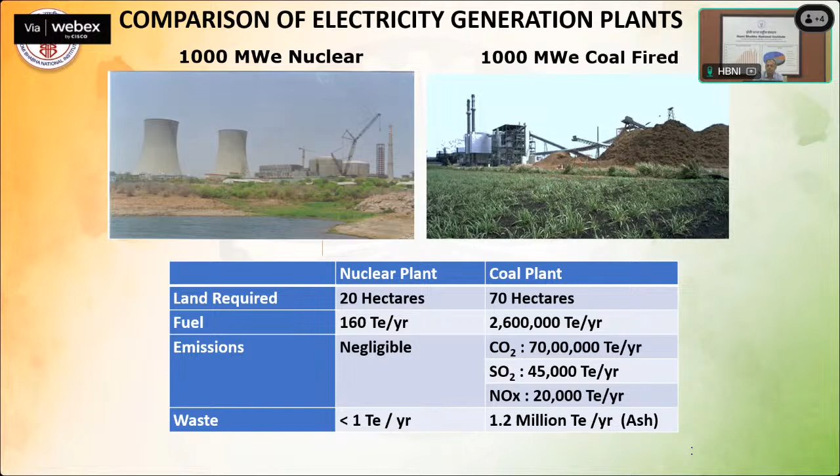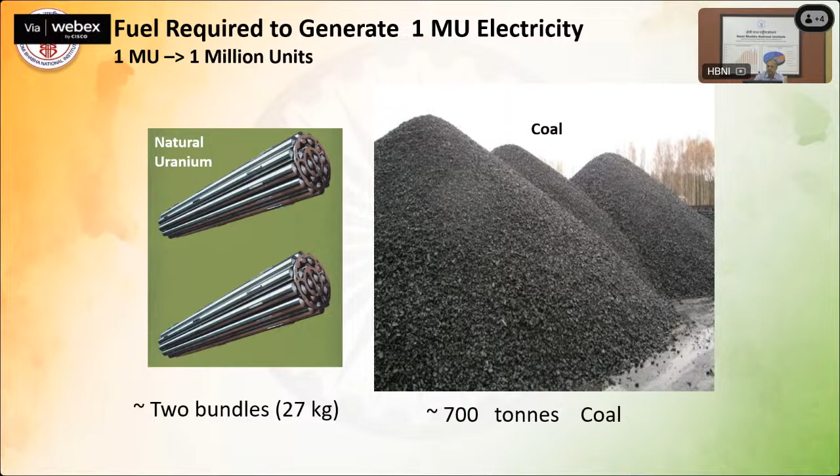What is the effect? There are no emissions from a nuclear power plant in the form of CO2, NO2, NOx gases, or SO2. From thermal power plants, when these gases are emitted, we see the greenhouse effect, which results in warming of the Earth's surface and the total atmosphere, because these gases trap the heat and do not allow energy to escape into space. That is how the temperature goes up around us year by year as time flies.

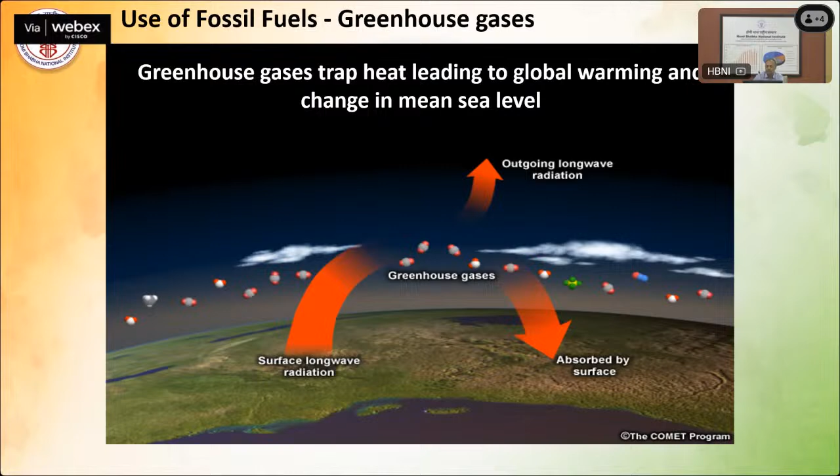So greenhouse gases trap heat, leading to global warming and change in mean sea level. The result is the impact of fossil fuel on climate - we get floods, we find glaciers continuously receding in the Himalayas, and this global warming results in a change in mean sea level by 1 meter, which will devastate India's coastal landmass. A lot of cities may get submerged if this trend is not stopped.

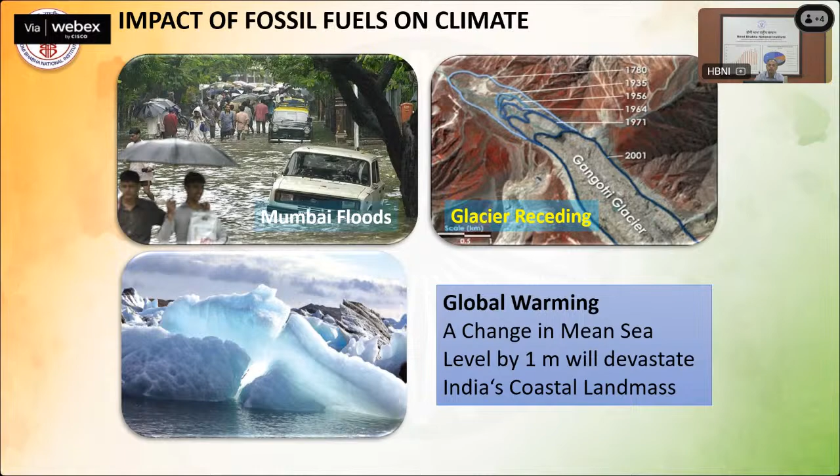We have various types of reactors in our country: boiling water reactors, pressurized heavy water reactors, pressurized water reactors, fast breeder reactors, and advanced heavy water reactor - though that last one is not in reality as on today, it is still in design. For fast breeder reactors, we have the fast breeder test reactor at Kalpakkam, and a prototype fast breeder reactor is coming up at Kalpakkam, a 500 megawatt capacity unit, which may be ready very soon.

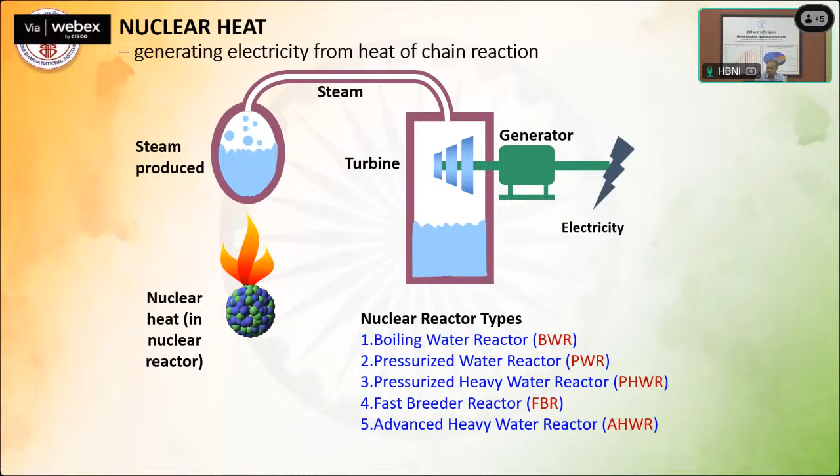In the core, the nuclear fission reaction takes place, and heat is removed from the fuel bundles in the coolant channel of the core through a primary heat transfer system. Then we have the steam generators, where steam is produced, and that steam is used to drive a turbine. The turbine drives the generator. You will find that the primary heat transfer system, the core, everything is placed in a containment structure - there are dual containments, basically to improve safety.

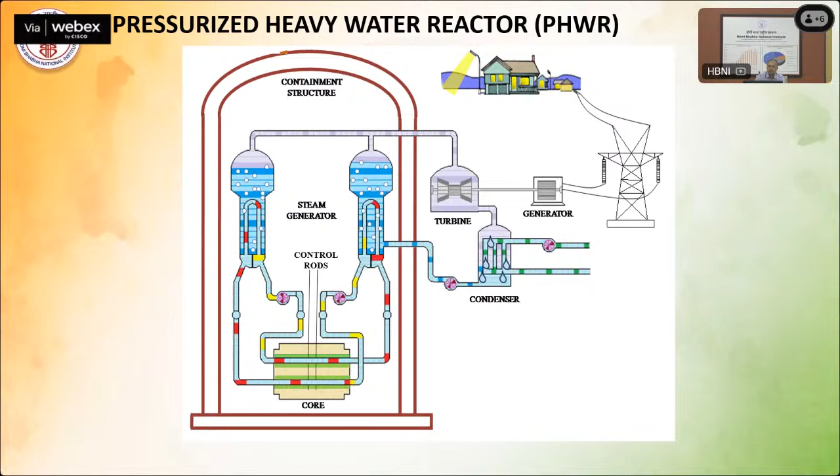The barriers are in the form of the pellet first - the fuel bundle, as shown earlier, actually contains a number of fuel pellets, and that is one barrier. Then the cladding - zirconium cladding - all those pellets are pushed into a cladding. The cladding is placed in the coolant channel, shown in red, which is flooded with the coolant. Then the primary containment building is there, followed by the secondary containment through the reactor building, and we have an exclusion zone for safety of the public.

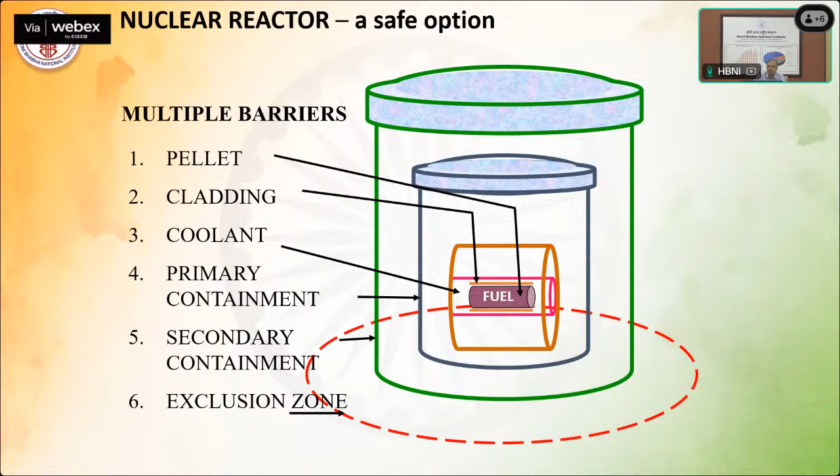India's three-stage nuclear power program. Basically, the idea is to utilize the country's vast reserves of thorium. That is our aim. So how do we go about that in stage one?

We have already mastered stage one, and now we are working closely on stage two. In stage one, we have PHWRs where we use natural uranium as fuel. From the spent fuel, when the fuel is used in the reactor, what is left out is the spent fuel. We call it spent fuel, but as I mentioned in my previous lectures, it still contains very useful isotopes like plutonium, and it still contains depleted uranium U-235.

So that can be reused and recovered. This uranium and plutonium are recovered in our reprocessing plants and can be used as fuel for fast breeder reactors. We are already using that in FBTR. In FBTRs, we use this plutonium and thorium as blankets, and thorium gets converted into U-233.

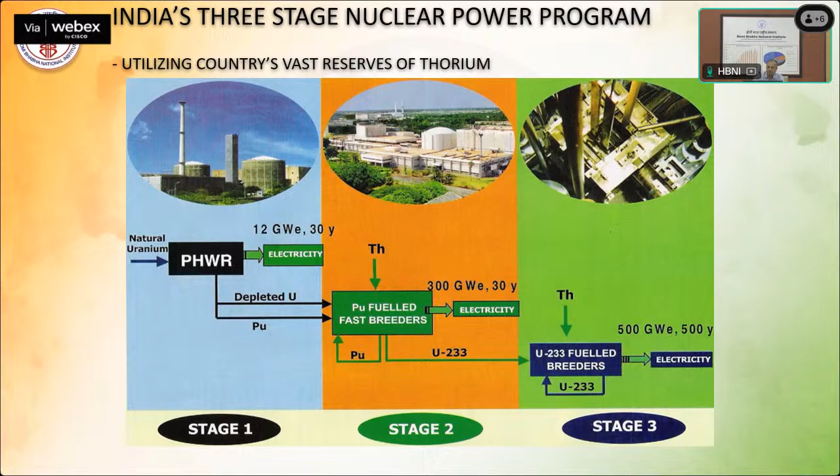The same thing is shown in this slide. I think I'll have to go a little faster. So stage 1, stage 2, stage 3, same as shown. The three-stage nuclear power program ensures optimal utilization of uranium and thorium resources. We have plenty of thorium resources and we aim to use those resources for generation of electricity as efficiently and as soon as possible.

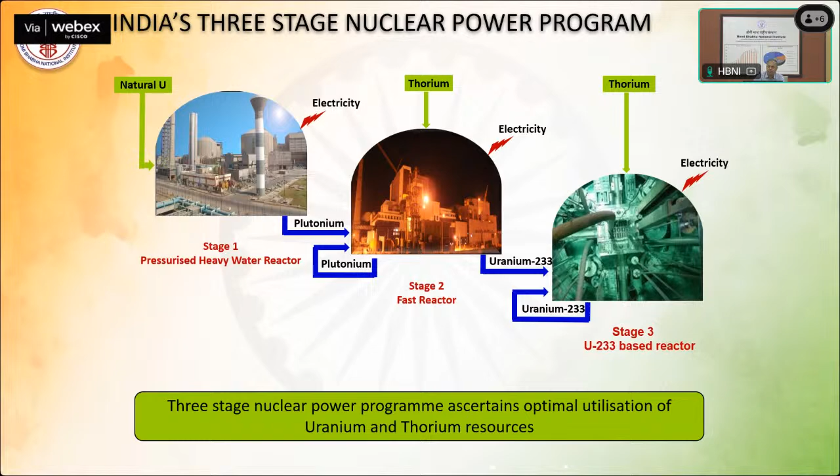We discuss radioactivity now. Radioactivity is actually there in our life on an everyday basis. What is the established fact? That bananas contain potassium-40, which is radioactive, but it is not harmful. You all would agree with me. During air travel, from cosmic particles, cosmic rays, we are exposed to some kind of radiation. But it is all still very safe. There is nothing to get worried about.

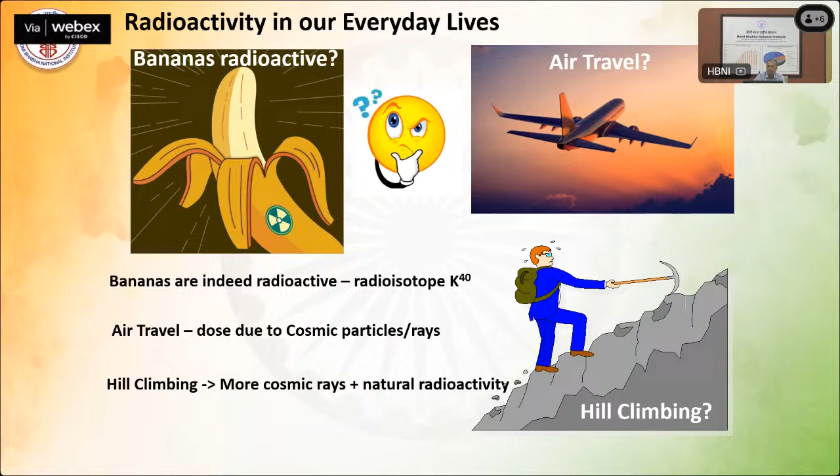When we are climbing hills, we are also exposed to cosmic rays. We are exposed to natural radioactivity also. So radioactivity is part of our life, you can say. Radiation is our friend. It is there and it is very useful.

We had seen in previous lectures also that there is a natural background to the tune of 2.5 millisievert per annum that a man gets from nature, without actually having anything to do with it. You get it, whether you like it or not. That is in the form of radon. From the air, we get 51%. From food, we have seen that banana contains potassium. Like that, there are other foods also which contain some kind of radioactivity.

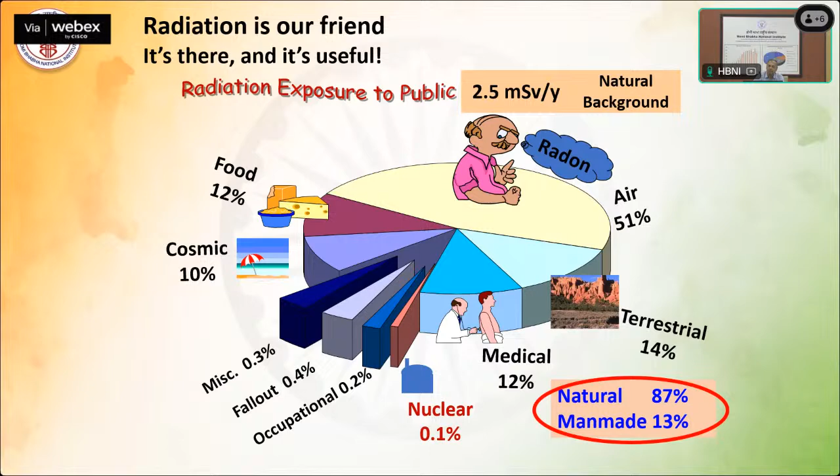So from food we get 12%, and from terrestrial sources 14%. So nature's contribution to radiation exposure is to the tune of 87%. Then we get radiation from medical treatment, from various kinds of fallouts, from occupation—some people are engaged in activities where radiation is present—so that percentage is just about 0.2%. And from nuclear activities, nuclear programs, the exposure is only 0.1%. Negligible, of course.

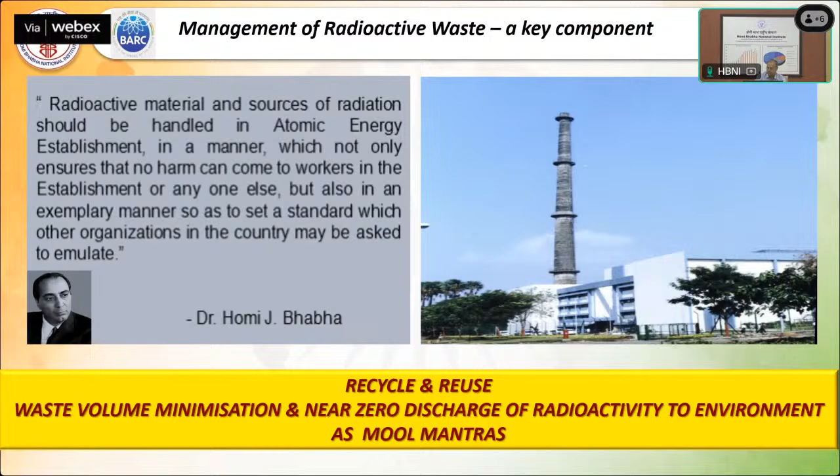Now, the generation of waste. This is an established fact that human civilizations, in fact all industrial activities, give rise to some unwanted byproducts which are called waste. And it applies to the nuclear industry as well.

In countries with nuclear power, radioactive waste comprises less than 1% of total industrial waste generated. But it does mean, when looking at the total waste volume of a country where nuclear power plants or nuclear facilities are there, it is found that the contribution of nuclear waste is only 1%. The other waste is 99%.

And of course other waste - since we are talking about CBR and emergency challenges, I should not say just chemical waste, but this picture shows that chemical waste hazards are forever, while the nuclear waste hazard potential gets reduced with time.

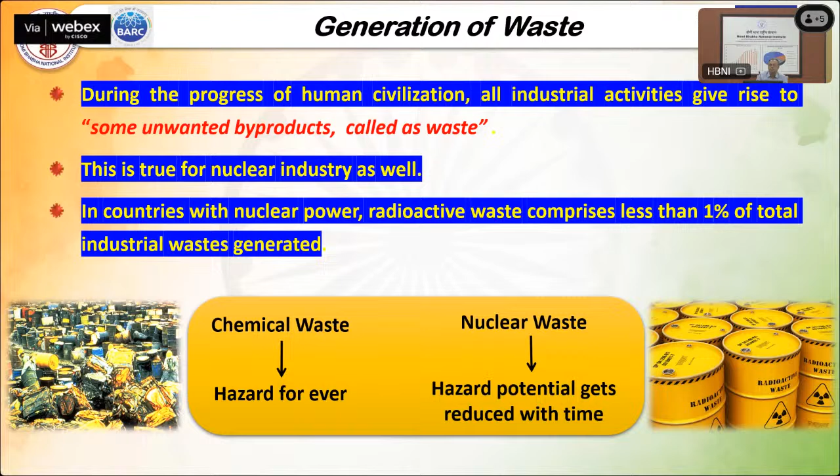Now the objectives and philosophy of management of radioactive waste. We have seen in earlier lectures that the basic tenets are delay and decay. If there is a very small, negligible kind of radioactivity in the form of beta-gamma activity with a very short half-life, then we will delay its disposal and allow it to decay.

Wherever it is negligible radioactivity, exempted waste kind of thing, something like BDL - below detection limits - it can be discharged at near zero discharge facilities. And whenever it is high radioactivity, we have to concentrate it, its volume has to be reduced, and it has to be contained well within the institutional system. We'll see more details a little later.

Principle of reduce, recycle, and reuse will apply wherever we are able to remove and recover the radioisotopes. We will try to recover, reuse, and recycle that - you have seen uranium, plutonium, we recover and try to reuse. Or we recover cesium, ruthenium, etc., and use it for various applications in industry or in the medical field.

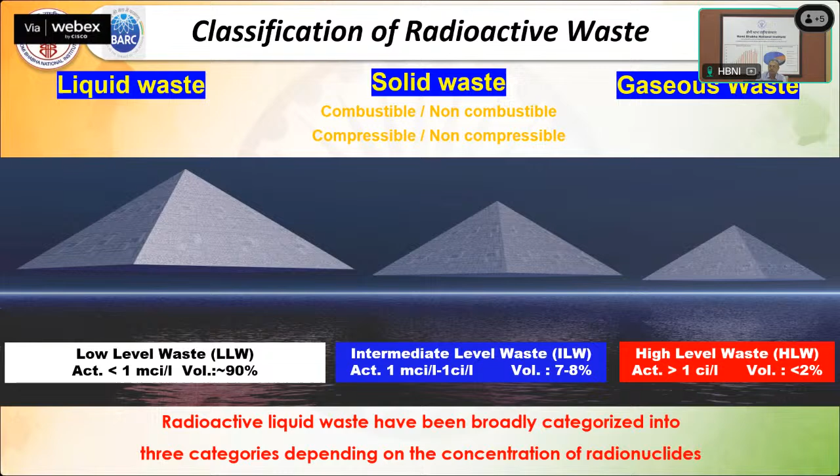And of course, we have liquid waste, solid waste, and gaseous waste also of combustible or non-combustible type, compressible or non-compressible type also. We'll see little details further - this we had discussed earlier also.

So radioactive liquid waste, how we treat when radioactivity is less - then we try to reduce the volume, in such a way that the volume is drastically reduced, and of course radioactivity level will be the same. That applies for very, very low level liquid waste.

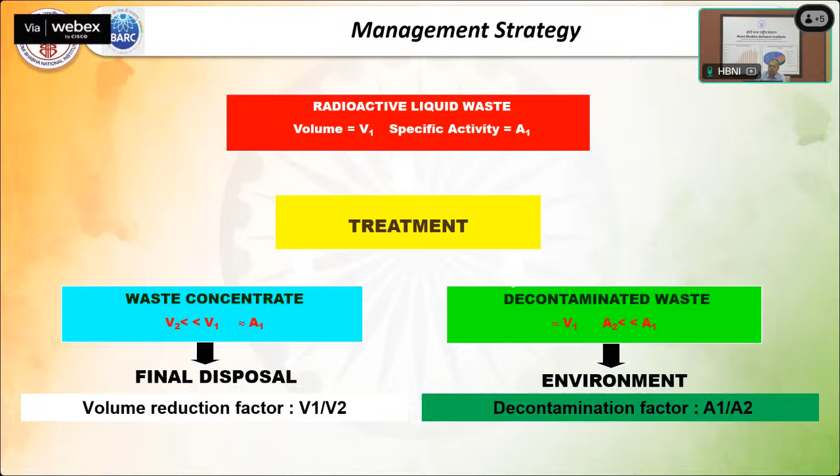And when it is high level liquid waste, then we try to reduce the activity by recovering the radioisotopes. So activity is drastically reduced, volume is more or less retained. That is the basic principle of radioactive waste treatment management strategy.

Waste management is actually a hybrid science and technology, where we have separation chemistry, material chemistry, nuclear chemistry, spectroscopy, thermochemistry, and all types of technologies used in the field of nuclear waste management - that is chemical, mechanical engineering, glass technology, electrical and electronics engineering, and robotics engineering also.

All these technologies and science are applied in the treatment of nuclear waste. So waste characterization for physical, chemical, and radiological properties is done. Radioactive waste is first pre-treated, then treated, conditioned, and finally disposed of. Nuclear materials are recovered, recycled or reused, and whatever negligible exempt waste is there is disposed to the environment.

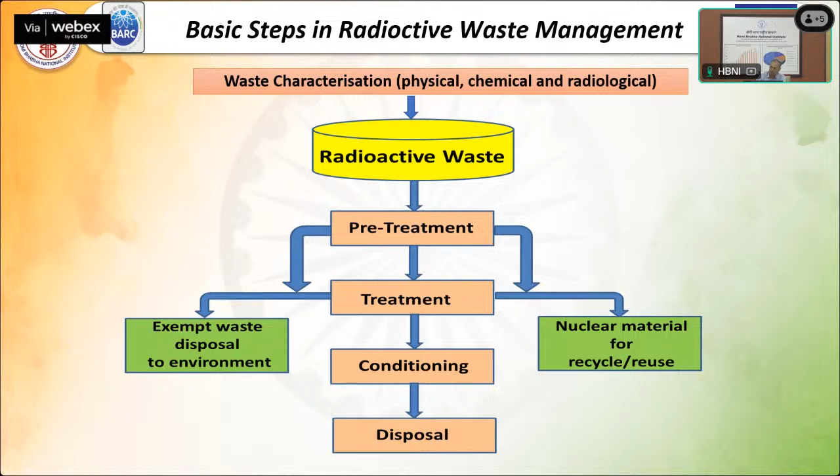Now we talk about the gaseous waste. So we use HEPA filters, and chemical impregnated activated charcoal. These HEPA filters are high efficiency particulate air filters made of microglass fibers. Wherever gases are generated during the process, they are passed through these HEPA filters.

All radioactivity particulates, whatever particulates are there, are actually captured - they are not allowed to pass through the filters. And then the clean air is finally disposed of from our tall stacks, so that radioactivity is not really released into the environment.

And then we have absorbents, something like nickel sulfide coated alumina. We call it chemical impregnated activated charcoal, which can absorb radioactivity like ruthenium-106. So the idea is we dilute it by removing the particulates and finally allow the dispersion after delay and decay.

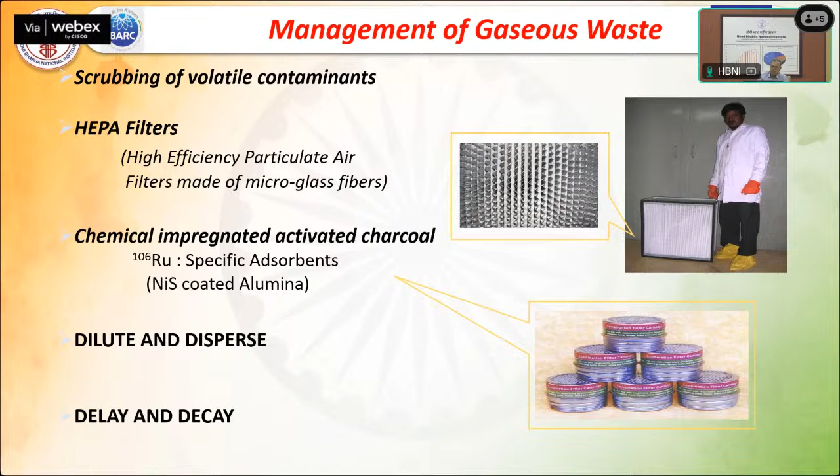Low level liquid waste treatment methods - no, sorry, low level solid waste treatment methods. So here we have principles like compaction, combustion, and melt densification and incineration.

Plastic and rubber, which can be compacted, so we reduce the volume. Combustion - whatever cellulosic waste is there is combusted, burnt. And melt densification, where volume can be reduced - that is polythene, which can be densified.

And then category 1 solid wastes are there, which are incinerated. So we have developed some new types of incinerators which are plasma assisted, where a volume reduction factor of the order of 30 to 40 is achieved.

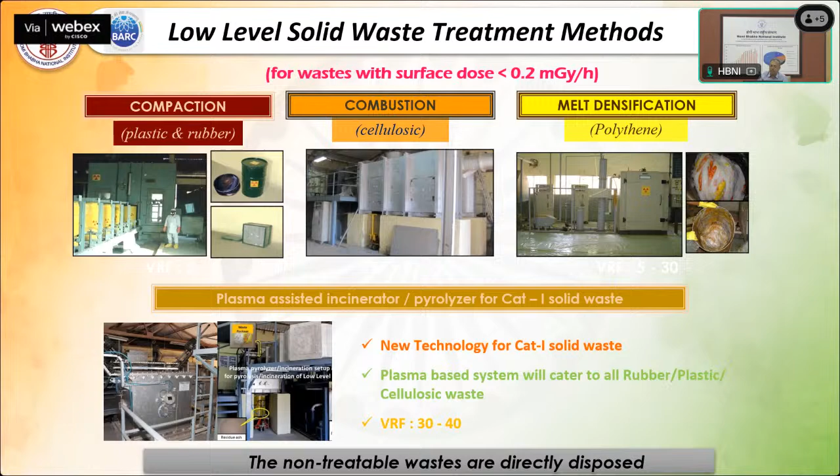So the non-treatable waste are directly disposed of, which of course will be very, very low in the strength of radioactivity.

Then we are talking about the solid waste. Whatever low level radioactive solid wastes are there, they are disposed of in near surface disposal facilities. This is our own facility, not in the public environment, well within our campus, on our own site. We take full measures for safety of these sites, and what we dispose of is only the low level radioactive waste. The multi-barrier concept for isolating surroundings and controlling radioactivity released to environment is followed.

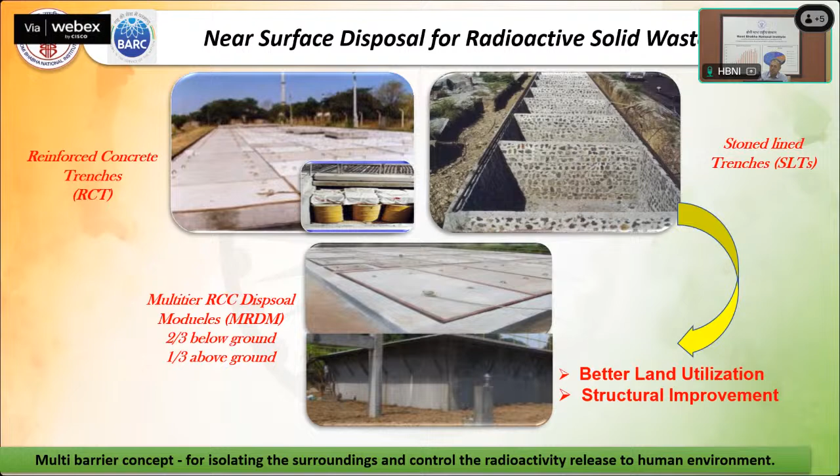Then low-level liquid waste treatment, that is in the form of chemical precipitation through coagulation and flocculation, ion exchange through polyurethane foam coated with Cu ferrocyanide and hydrous manganese oxide as exchanger. Basically, this helps in recovery of radionuclides like cesium or strontium, etc. And then reverse osmosis for waste containing low solids, using membranes, spiral type or so on, for recovery of certain radioisotopes.

Near zero discharge of radioactivity to the environment - that is, of course, the principle.

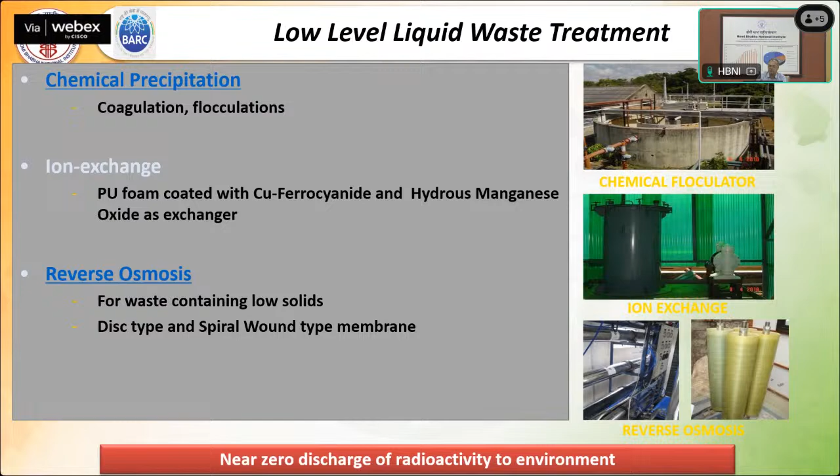Now, understanding the ion exchange mechanism by hydration theory: the resin granules release sodium and absorb cesium ion, for which it has a greater affinity. Ions are not destroyed or changed chemically; they are simply replaced on the resin granule. This process is known as ion exchange.

Actually, in the next lecture, which is on the 6th, this will be discussed in detail by our Dr. Kaushik, CP Kaushik.

Now, near nuclear waste storage and disposal, that is about the high-level waste, which is in the form of liquid mixed with liquid glass. It is heated up to about 1000 degrees Celsius, then poured into containers, canisters, and all of this is remotely handled. That's why I said robotics engineering is applied in waste management systems.

This entire operation is carried out in highly sealed, biologically shielded cells, which we call process cells, and all operations are carried out remotely with the help of manipulators, cranes, and other robotic tools and instruments. Then it is welded also.

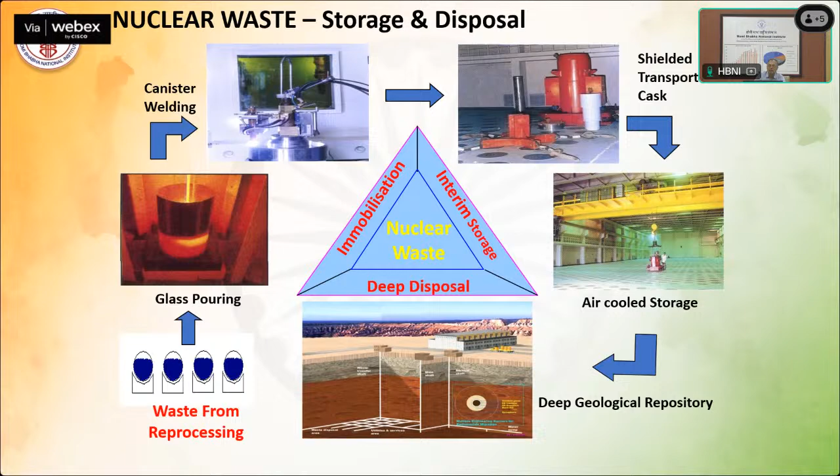Wealth from nuclear waste - we had seen this in the last lecture also. From the spent fuel, we are able to recover uranium and plutonium in our reprocessing facilities. And from the waste, in the waste management plant, we recover cesium, strontium, technetium, neptunium, americium, and so on, transuranics, and how they are used in various industrial and medical fields. We'll discuss more details in the next lecture.

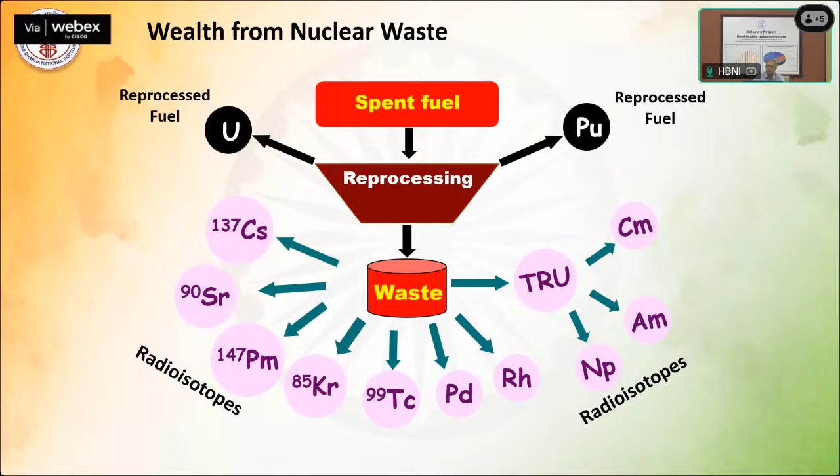So reprocessed fuel, that is spent fuel, and radioisotopes are like this. Thank you very much. Thank you for your time.